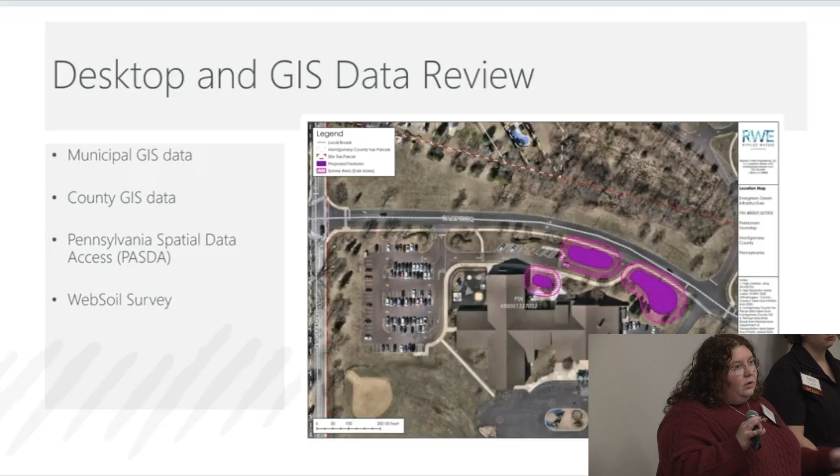You can see here on this example, this is a map that gets sent out to surveyors so they can understand the site. The dark purple is the proposed area or the project area, and the hatched area on top is the survey area—just so I know what's there, what's not there, what can I put there.

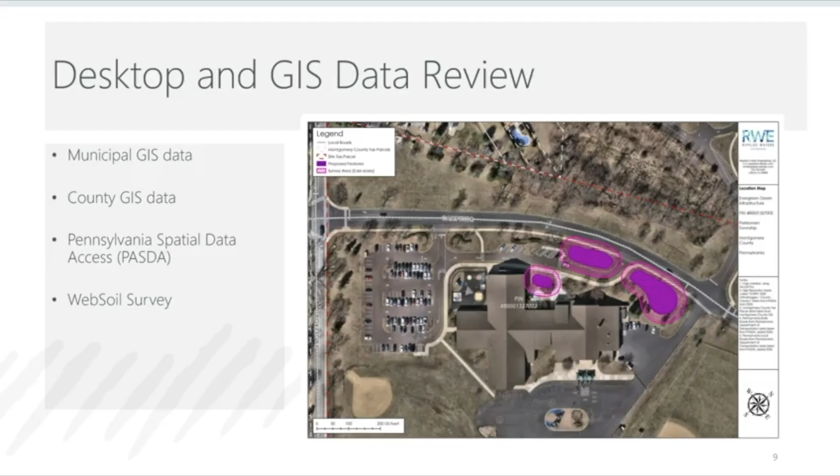You can see some of them have closer proximity to the buildings, so that's also taken into account when building any rain gardens or structures in those areas. I've got the parcel data on there as well. The red dotted lines mark the site parcel, so having that identified helps their life, helps my life, and it's great. And then we have streets, just so everybody knows where everything's at.

So, like I said, step 2, we gotta really understand. There's only so much you can do from looking at a computer, so we get out to the site.

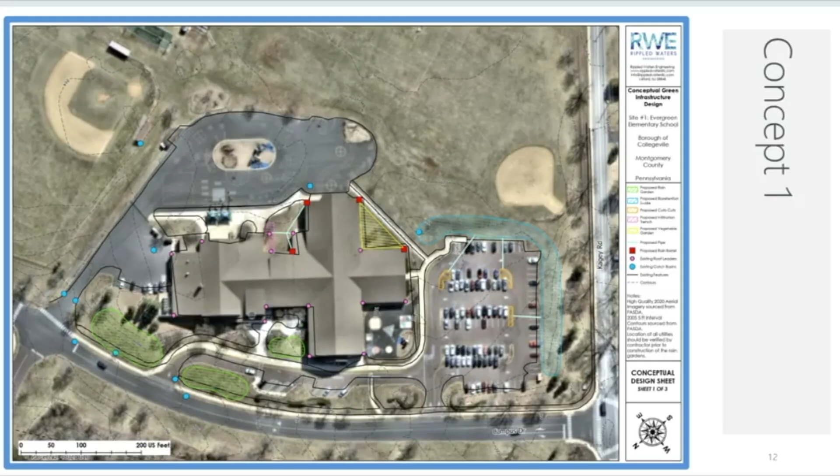Okay, so then that brings us into our initial conceptual designs for each school. So the school that I was just referring to with all of the drains is this school up here. I know the colors are kind of light for this purpose, but bear with me here.

So the green hatched areas are all of the proposed rain gardens that we had for this area, and you can see the blue little dots are catch basins. Can we see those okay? Good. So there's a million of them there, but this site has virtually no green space but grass.

Pretty minor tree cover, and that was really it. This is an elementary school, and they really wanted to get the kids outside more. They have this great, beautiful playground area, but it's all pavement. They wanted something a little bit more hands-on and educational.

So that's where these rain gardens come in. Educational signage would be a great little boost for that area. One of the teachers wanted to install a garden, so you can see that yellow triangle is another area we marked off for a potential vegetable garden, for the children to learn more about being in the environment - what is soil, what does it do.

The little tiny red squares are the proposed rain barrels. We were trying to look at how we can make this more sustainable for the school so we're not introducing a huge cost for them to maintain. We add in the rain barrels - one less thing to worry about, they already have water. Then they can carry their cute little watering cans over there and water their garden, all these small children, and it makes it much easier.

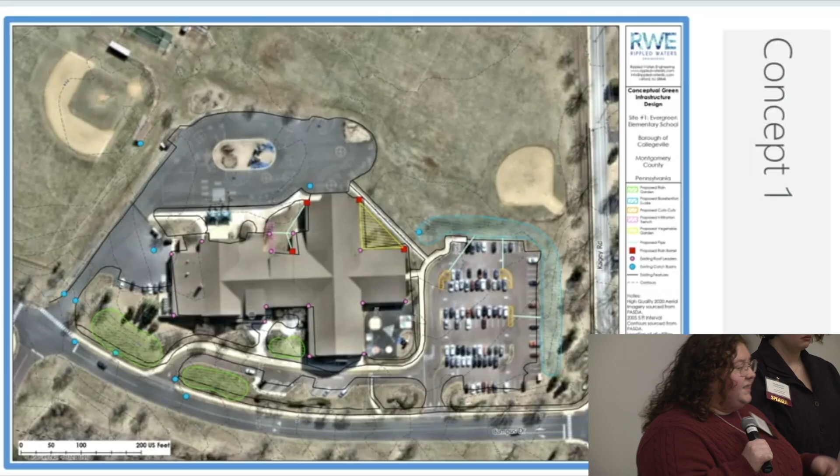Not a lot of usable space though. You can see that blue hatched area - great spot, right? We were thinking about putting an infiltration basin in that curved L shape to try and capture all the runoff coming from that parking lot, and introducing some curb cuts and some underdrain pipes to self-feed it.

Does anyone have any questions about that? I just said a lot of words. Yes? What is a catch basin exactly?

Catch basins are the things on the side of the street that are like little grates, and the water just runs into them. But depending on your municipality, it really depends on how well maintained they are. Sometimes you get a bunch of leaves, like in a heavy rainstorm, they could get covered by leaves, and then you've got backed up water on your road.

So they have plenty of them to maintain that area, but you have to worry about the roof leader situation - are the roof leaders going into those pipes or are they not? Just gutters that come off the buildings? Correct, yeah, and sometimes people have them where they're just free flowing into the grass, and some people have them where they're buried.

This situation, they had them buried to where we could tell at one point they were connected to another row of pipes, but we weren't specifically able to confirm - they were PVC, so we weren't really sure if they're connected to the catch basins or separate.

On that same topic, with some new developments, they can ask a municipality to install a new catch basin for them to install green stormwater infrastructure on top of.

Considering you're doing projects on already built structures, are you working with just existing catch basins and trying to understand it that way? Correct, yeah, so we're just looking to avoid them at this point, because the area gets a pretty good amount of water, so we're not going to connect into any existing pipes, but it's more so just informational, so we know what not to dig into.

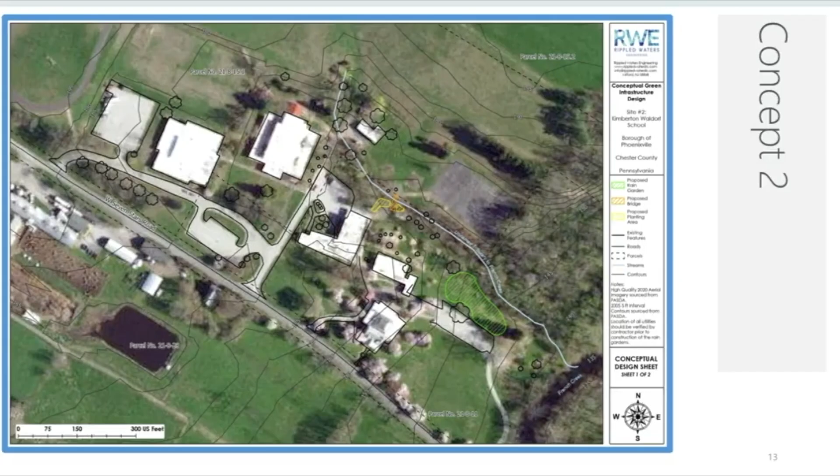So anyway, good, I'm going to move to our next site. Again, a little hard to see, so there's a lot of lines on this one. This site had a few issues - this was the site I was talking to you about with the stream and the crossing and the children. When I say children, I really mean 4-year-olds trekking through the mud.

Marguerite knows what I'm talking about. We were there, it was very interesting to see. And it's a very shallow stream. There was literally nothing in it when we were there. It was more of just I took one step over it. But...

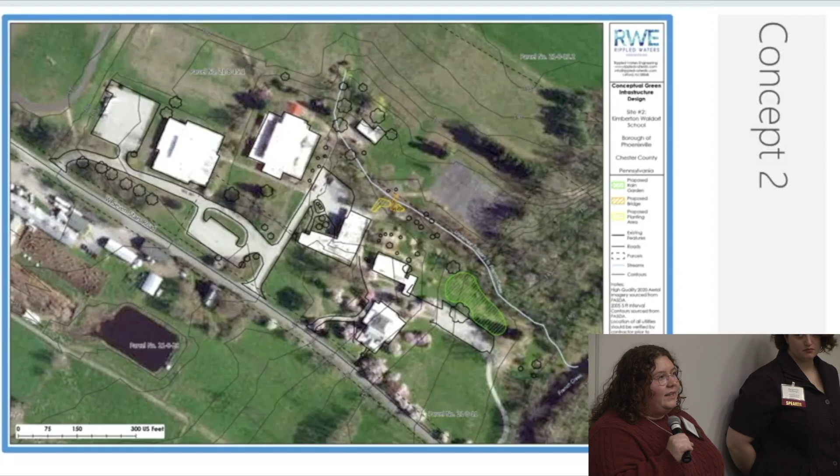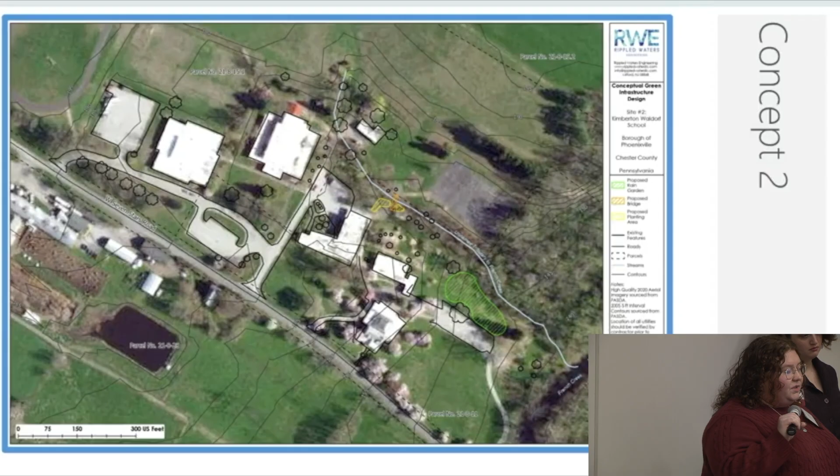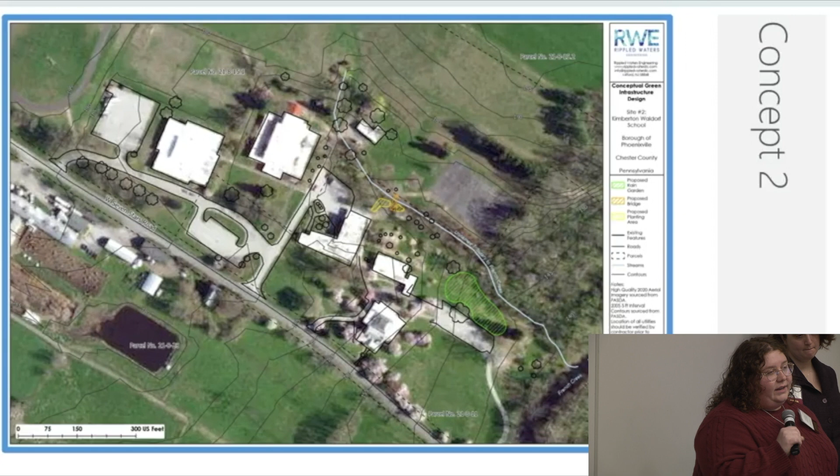When peak flows are high and you're getting a lot of rain, it's muddy. So for this site, we were proposing throwing in a bridge crossing so that the kids have safe access across. And to solve the issue of all the dry, barren banks, we thought let's do some nice plantings, a riparian planting area on either side, and also try to solve it with some green infrastructure, live staking right into the bank. If anyone's familiar with stream restoration work, a good tool for non-structural restoration is using live stakes.

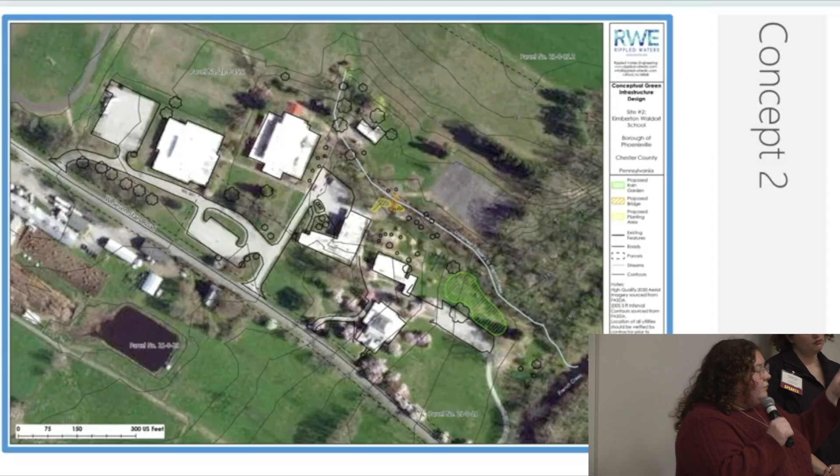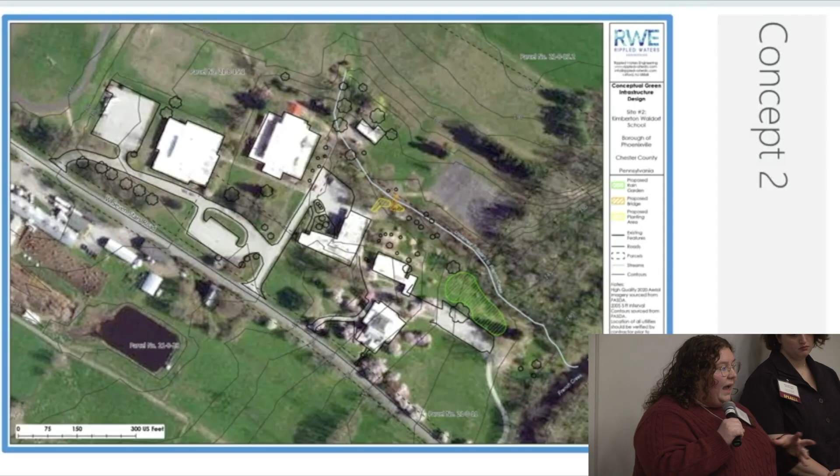So that was a component we were looking to use at this site as well. And then you can see that nice green shaded area is another rain garden we were just throwing in for fun. This site, you can see the stream is that very light, almost white bluish color. They had a lot of grass, just a lot of grass. There's not really much soaking any of that water up when the stream does overflow. So having a little rain garden there can help capture that extra water and make something beautiful and good for nature, a nice pollinator area.

Did anyone have any questions about that one? Sorry, I jumped quick. Yes? That blue line is this stream.

Just out of curiosity, was it an intermittent channel or was it perennial? I think it was perennial, but sometimes there's good data on that and sometimes there's not. So it was more of a, okay it should be here and it's not, kind of thing. It was also a very dry year. And when we went out to all of these sites, it's very important for us to understand, not just by looking at it since I'm only there one day, asking the administrators and teachers what their biggest problem is, is half the battle in understanding the area. They said it's usually always flowing, but they contradict sometimes, so it depends.

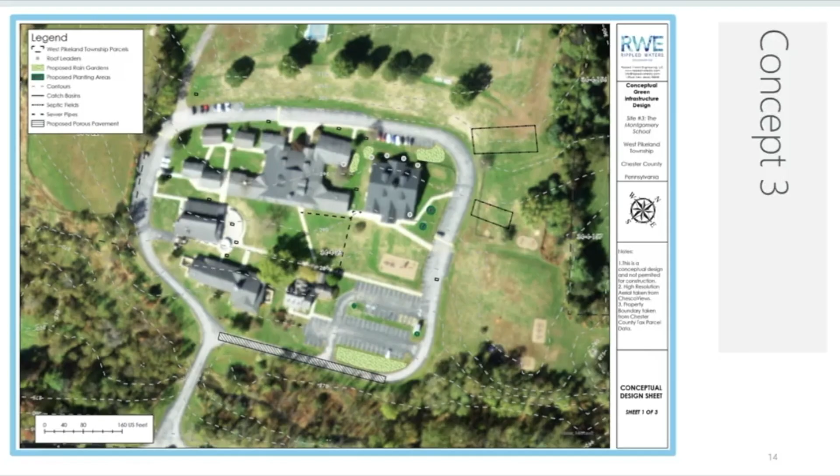Okay, so this is another site with all the snow I showed you earlier. This site had a few issues. We were proposing just a bunch of rain gardens here because again, all grass, literally nothing but grass. And all the way on the top road of that parking area, let's use this laser pointer, can you see up here? See that darkened area? That's actually a wet spot from water that's been filling up in that grass area and just pouring itself out into their driving road for the parking area, which is also directly next to the playground for the smaller kids.

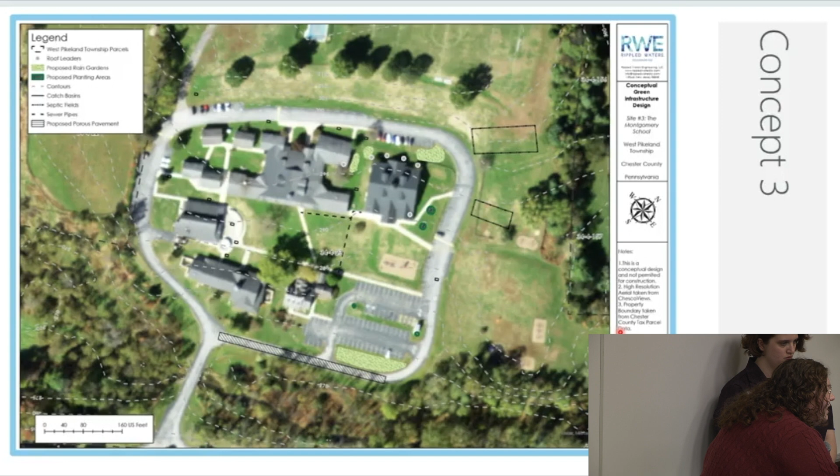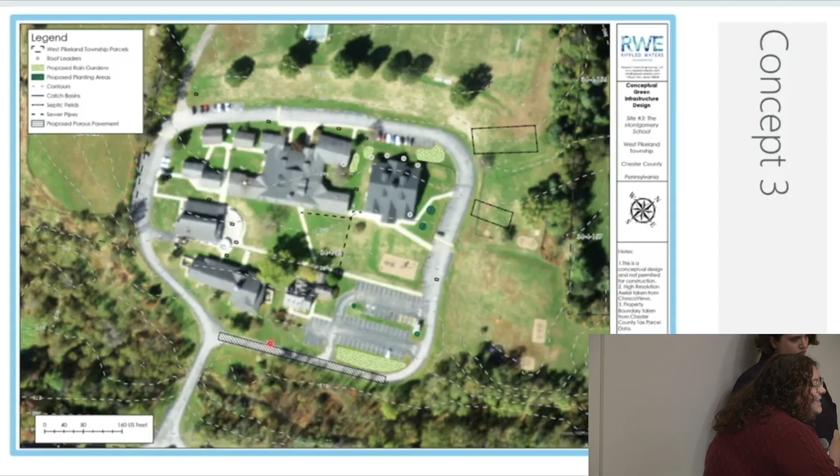So again, how can we solve that issue? We put in two different rain garden sizes to try and capture some of that stormwater, and another one on the opposite end to pull everything away from that edge. And down here, we have another rain garden, because there was more of that ponding water on their walkway, which you can see here. There's an existing rain garden here which is still establishing, so it's not pulling in as much as it could for this area. We also proposed some porous pavement in that black hatched area to really drive it home.

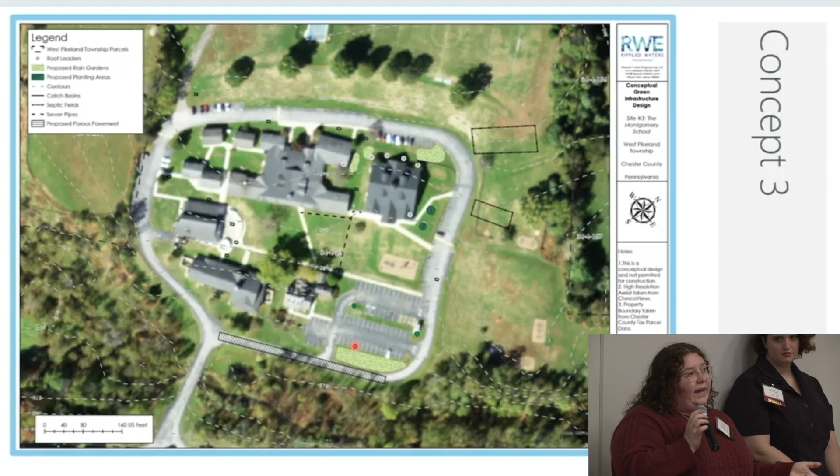Now these conceptuals are just about putting in a bunch of different things we could do to improve the area, not necessarily what's going to be final, which we'll get to later. There was one other rain garden proposed that you can't see on this sheet, but they have this big soccer field, and around the edge of the soccer field are all these wonderful inclines, so all the rain and runoff is pouring directly into this soccer field they use all the time. So we're proposing a nice little L-shaped rain garden to capture that edge issue, and some extra plantings on top because a lot of the trees in that area are all dead, so they need to be cut and replaced with something that's actually going to drink up that water.

Anything else on this? Yes. You mentioned the permeable pavement - I've heard that you have to have permeable pavement vacuumed every now and then, or it just kind of fills up with sediment. Yeah, how do you approach that?

So all of these projects, whichever would be taken to the next step, would get a maintenance manual. We're not just putting anything in and saying good luck. There'd be steps and directions within that manual for people to understand how they can keep it working long term. But it comes down to cost, right? How can you make sure you'll have that kind of budget? So that's something the schools would need to play around with, and potentially more grant funding.

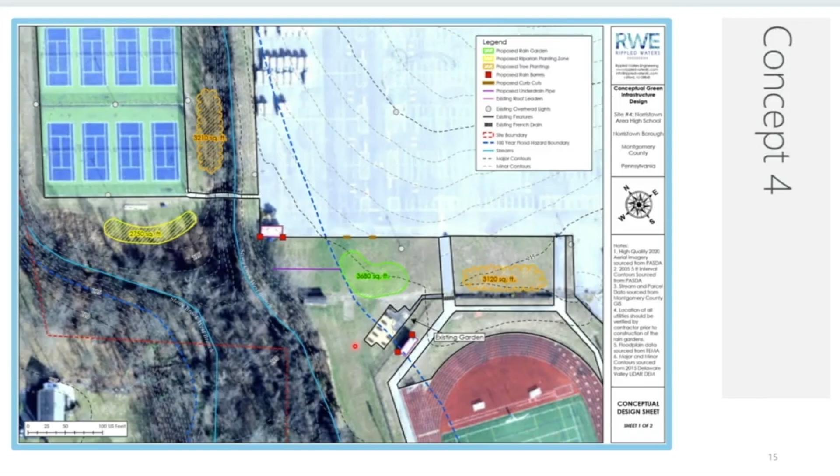This brings us to our final school. There's a beautiful stream on the left, you can see it's that light bluish aqua color. Maybe it's hard to tell with the trees, but there's a great riparian forested area existing already right there.

However, they still get a lot of water, it's just wet. And they've got this ginormous parking area, which I'm sure you're all staring at like, oh my gosh, what a crazy parking area for this school. It's huge, we've been there, the amount of parking is remarkable. This is the parking for their bus area, and they don't really use buses—they have minivans. Who knew?

That's pretty cool. So they had some existing sheds, which you can see in these little pink outlines—there's one right here, and one over here. And you see there's extra water, this little dark spot again, more water just ponding. This whole specific parking area is pitched back towards this entire track and field area, and all the water is just collecting here.

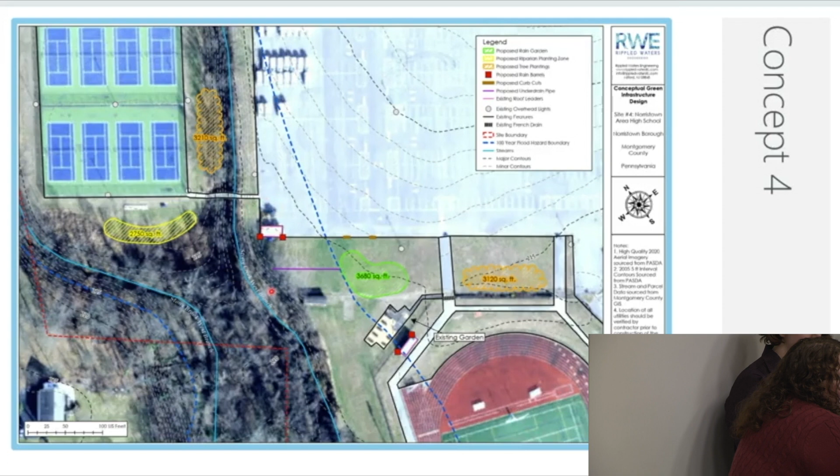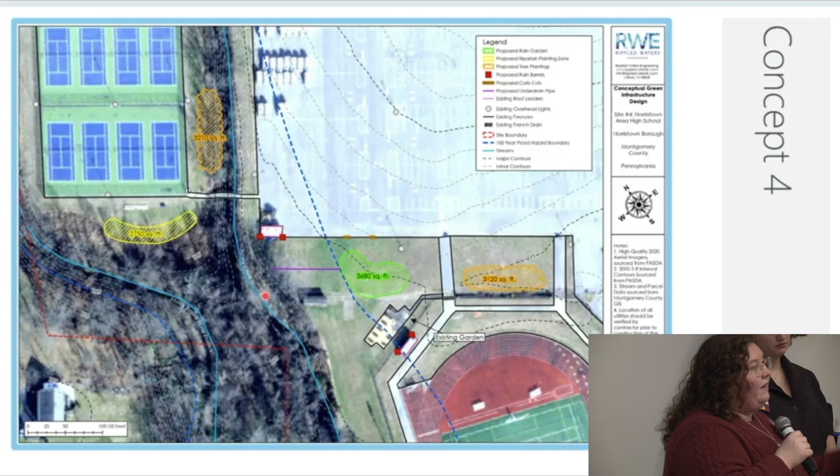To settle that a little, you can see we have this one rain garden here, and then it's under-drained and piped out into the stream for any extra water that would flow into it. Back when I was talking about site investigation, this specific site has bad infiltration—it's just not great for water. So these rain gardens would get filled with organic material to help it infiltrate much better, but in effort to save the plants, any excess water would be piped out.

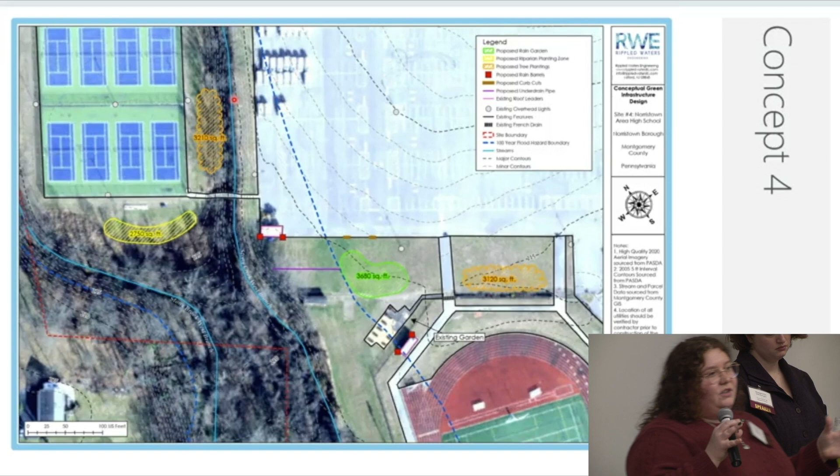Then these two orange areas are proposed tree planting areas, to give the area a little more tree cover. There's only trees in that forested area right around the stream, and then nothing but grass for days and days. The yellow area here is an extension, just trying to build out that riparian buffer zone, to give that stream some more coverage, because it connects all the way around on this side as well.

So they're double, and there's land in the middle. In effort to clear that all up, we put that in there.

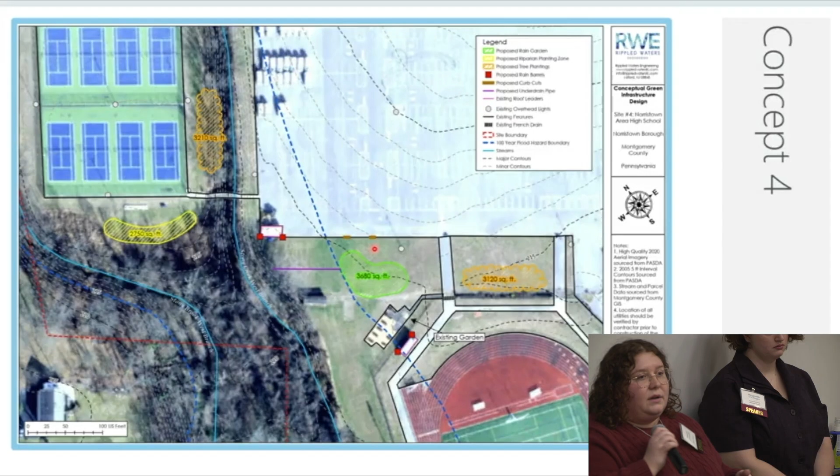Each little shed gets 2 rain barrels, connected into those roof leaders that already exist—if it's not broke, don't fix it, we can just pull water right from where it's coming. You can see these 2, might be hard to tell, but there's 2 little brown spots—those are potential curb cuts. Since the parking area is already pitched back towards us, in order to infiltrate our own water without doing anything extra, we're just going to curb cut those curbs, and the water will flow right into our rain garden with no problems. Then that under-drain, any excess water, goes right back out to the stream, filtered and everything.

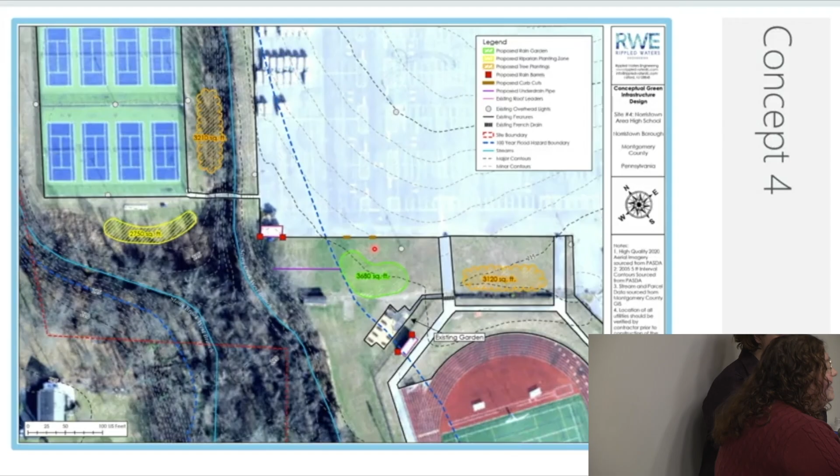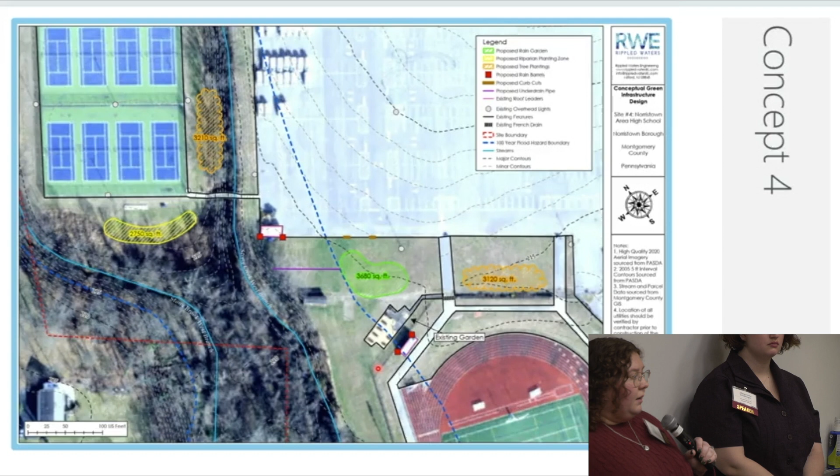So this one has a lot of different things, and like I mentioned earlier, this is the site that had that existing garden area. You can see this little block, they had all of those raised planter beds. So the rain barrels help them because they can actually feed their own gardens with the rain they're getting from the area anyway.

Any questions on that final one?

Did you have any problems with DEP, like getting a permit for piping back into the stream? We haven't gone to permits yet, we just did the first phase of design for these. That would be a conversation for the conservation district and DEP, but it would also depend on how much we're actually going to end up digging up in that area—probably about 18 inches of depth, so that's a regulator question for sure. But it's such a small footprint, sometimes they don't really care about the teensy tiny ones.

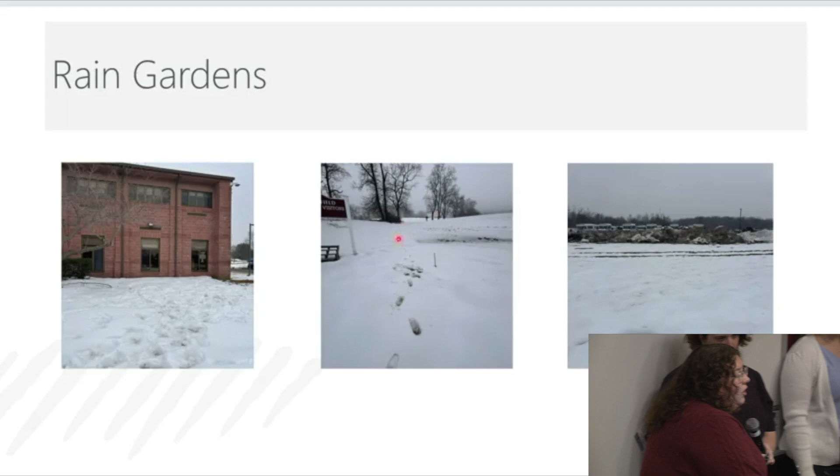And this is the soccer field I was telling you about. You can kind of see that dark snow back there. And then this lovely area — these are my footprints, I was doing a little test, and I sunk about 6 inches into the mud underneath the snow. So that's just a guiding rule for you — that's how much water is sitting there.

You can see it a little better here — these are those lovely hills I was telling you about, where the runoff is just falling right in there. And we've got some great dead trees more on this left side. But that's what we're working with on that one.

And then the last picture — this is where that other rain garden will be, where the schools already have the existing garden beds. This is kind of in front of them, and those curb cuts will be right where these giant mounds of snow are — they're like 6 feet tall, in case anyone was curious. It was crazy. You can see in the background the little fleet of vans for school pickup.

And it was also very wet at that site — there was a mystery ditch in the middle with lots of water. You can be out to a site multiple times; this was our second site visit and our first time seeing the mystery ditch, which doesn't show up on anything, or on the PA One Call we did. It's just a ditch full of water in the middle of their little planting area for some reason. So that's what they look like pre-development.

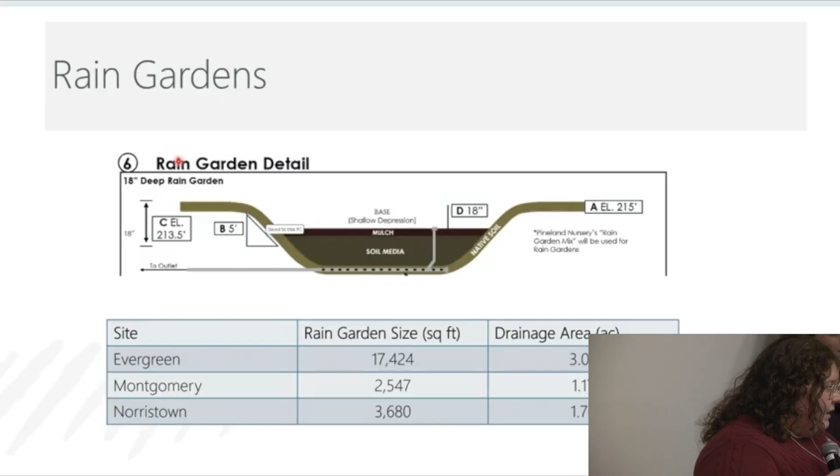This is the slide I mentioned earlier. It might be hard to read, but you can see that elevation is important. The elevation numbers shown here are just one example from one site—they'll vary in elevation and depth depending on final elevations based on whichever site, since they're all different.

This is the school I mentioned that has the under-drain feature—here's the top part, and this is the under-drain that goes out into an outlet. You can see the regular native soils here where the under-drain would be, and then we'll fill it with organic material.

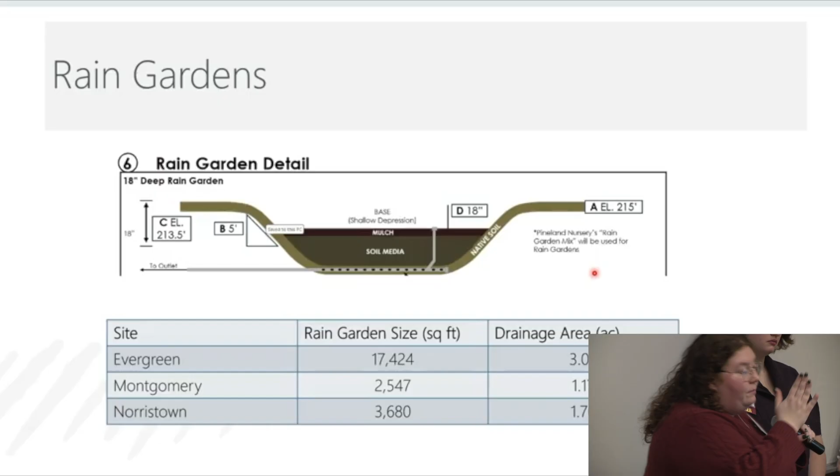So composted organic material—we have a specific percentage spec we look to, though I don't have it memorized, don't quiz me. On top, it'll be mulched, so the plants come right up through the mulch. We look for about a 3-to-1 horizontal-to-vertical slope on the sides, giving a bit of sloping to help pour the water in. These are the three sites we moved forward with to get that engineered aspect.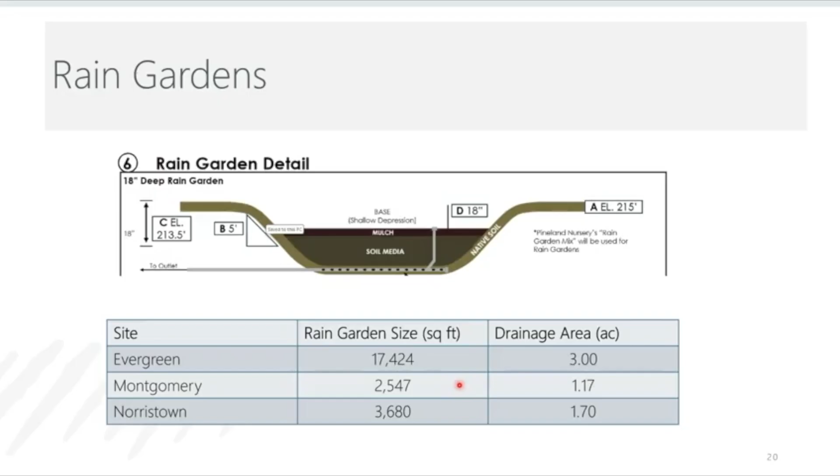So you can see their names, the square footage size of each rain garden, and the amount of drainage area they'll be drinking up. The first one is 17,000 square feet - that's actually 3 different ones combined, I didn't separate them, sorry. And they serve a drainage area of 3 acres, so that's what they'll be drinking up.

They're all roughly 18 inches deep, so not too deep into the ground, and we just layer them like that. Any questions? No? Good, okay.

I talked to you about a little bit of some sites having rain barrels. These rain barrels are just the 50-gallon ones - nothing needs to be bigger than that. And like we were talking about maintenance, the million dollar question, these just get maintained every 3 months - the barrel gets cleaned out, any blockages get removed. All of the schools have existing gutter systems, so we're not really adding anything new, we're just sticking that there and they can use it at their own free will.

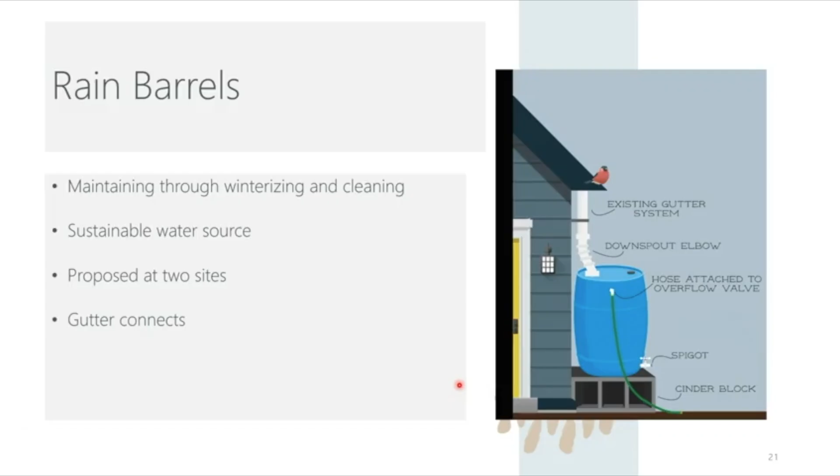This is a little graphic just for your viewing. The spigot will be on the bottom so you could fill up your watering device if need be, or a hose if you feel like it. We have 2 sites with these connected, proposed, and it's a great sustainable water source. So the places that want to garden really just have to worry about their seeds, their mulch, their soil, and all that, and they already have water. Any questions on that? Yes.

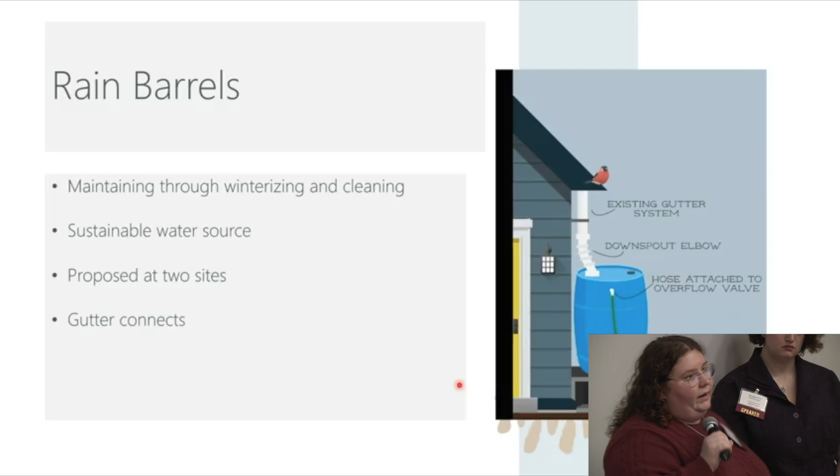What happens in the summer when no one's there and you get a really heavy rain? Do you have diverter systems so that when they leave they can close it up so the water goes to the existing drainage that takes it out the way it used to? Yeah, they totally could - it really depends. Some schools have maintenance there year round. It really just depends - one of them's a private school and they do year-round things. So it's very dependent on each school, but yeah, they could just take it out, take it down for the season.

No, there's actually a downspout system where you can change it - yeah, that's what I was asking. Yeah, we didn't specifically plan those out for them, it's more that we just put them on the drawing for right now. But that's a great point.

Any more questions? No. All right, and that's our talk.

I would like to add just one last thing about the timeline of where we are with this project. As we've said a couple times now, we are at the final stage of the planning part, and we have notified the grant winner schools that they are getting the fully engineered designs or partially engineered designs, and that will end at the end of April. After that, we will move forward with our first choice school and we're hoping to start implementation possibly late this summer, early fall, or depending on what's going to be planted, we may wait until next spring.